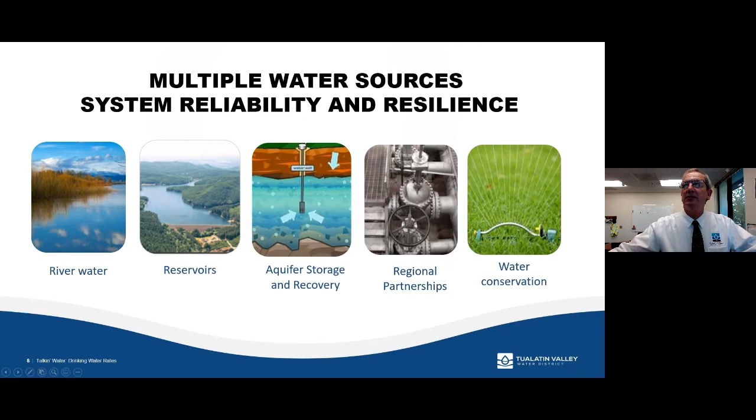So how is your money used when you pay your bills? What do we do with it? One of the things we are doing currently is the construction of the additional water supply. It is driving everything right now, and you'll see and hear more about that momentarily. But that's not the only thing. We have repairs and replacements of aging infrastructure in the system. This work has to be done in order to continue to have a reliable supply, so that's another thing we use the money for.

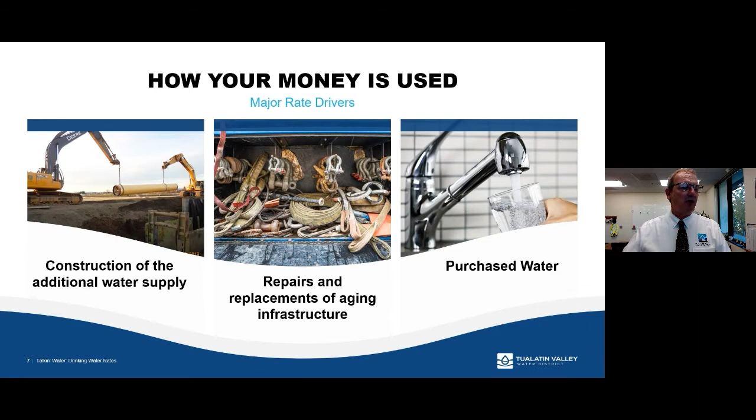And then lastly, purchasing water through the Joint Water Commission and the Portland Water Bureau is the other big area of spend and what we do with your money. But we take this all very seriously, and if you could go to the next slide, I'd like to explain a little bit about some of the challenges.

So we've taken actions to manage costs, working with the team here. I asked everybody on the team to look for how we could save money, where could we make cuts. We did reduce our personal services by about 2.8%. I like to point out that we are a lean organization, and we don't have a lot of extra staff capacity.

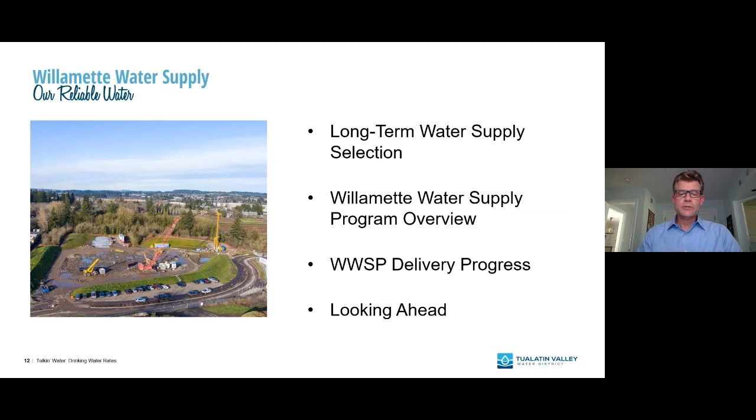I work for TVWD as the director of the Willamette Water Supply Program. I've got four parts to my presentation tonight. First, I want to talk a little bit about TVWD's history in terms of its evaluation and identification of long-term water supplies. Then I'll give you an overview of the Willamette Water Supply Program, tell you basically what it is. Then we'll talk about the WWSP delivery progress, what we've gotten accomplished since it started, and then looking ahead, what we plan to do for the next fiscal year and the years thereafter.

Regarding TVWD's long-term water supply selection, it actually begins back in the 1970s when TVWD acquired water rights to the Willamette River. Since doing that, TVWD periodically evaluated its water supply options, and that really picked up steam in the early 2000s.

TVWD commissioned a detailed study starting in 2011, so 10 years ago, that concluded in 2013, where the board selected the Willamette River after a multi-year technical study with public input. That study included the four options shown here on the right-hand side of this graphic.

Starting from the top and going clockwise, the first was groundwater wells to the north, developing a new supply there. Purchasing additional water going forward from the city of Portland to the east. Constructing the mid-Willamette River supply, or increasing storage at Hagg Lake and basically increasing the supply from the existing Joint Water Commission. Ultimately, through this study and with the public input, the district selected the mid-Willamette River supply.

For these notes captured here on the left, it was the lowest cost alternative, so it has less impact on rates. It provides excellent water quality as proven through almost 20 years of operational experience for the city of Wilsonville and also for the city of Sherwood that receive supplies from the Willamette River. It provides an ownership opportunity of the water supply for TVWD, which it currently does not enjoy with the city of Portland. It's a reliable supply, and of these options considered, it has fewer environmental impacts upon implementation. So the mid-Willamette supply, or the Willamette River supply, was selected as the long-term water supply source for TVWD.

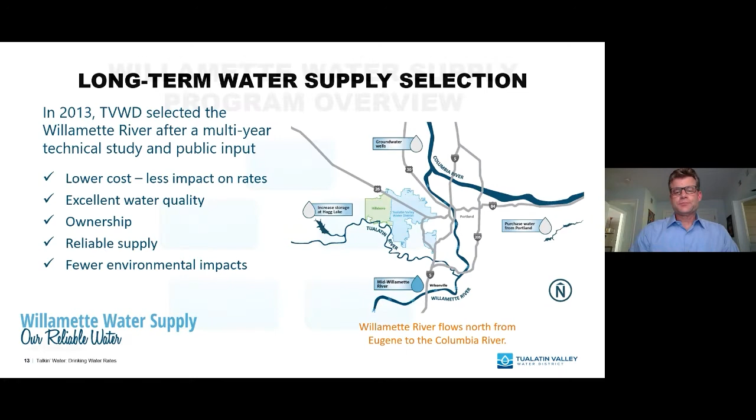So with that, we had to define the Willamette Water Supply Program, and these next slides provide an overview of what that program is. It starts with creation of our mission statement.

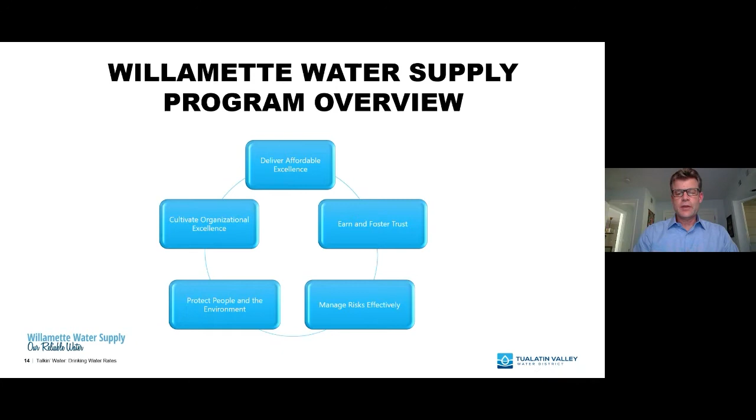The mission statement basically guides everything we do in the program. Let me read it out loud here for everyone: it is to provide a cost-effective, reliable, and resilient supply system by July 2026 that benefits current and future generations of the communities we serve and supports a vibrant local economy. That mission statement really guides everything we've done on the program and all of our planning. It has a target end date of July 2026, so all of our scheduling is to achieve that date successfully.

So that's the definition of the program. There's a new abbreviation here now, WWSS, the Willamette Water Supply System. So the program that I'm running is to create and build the system, the Willamette Water Supply System. Here's a really high-level overview of it.

It starts at the Willamette River with an existing intake located in Wilsonville that we are expanding and improving the seismic capacity of. We are also constructing a new state-of-the-art water treatment plant on the eastern side of the city of Sherwood. We'll be building more than 30 miles of large diameter water transmission main and water storage tanks up on Cooper Mountain. The graphic on the right here shows you, in very schematic form, what the whole Willamette Water Supply System looks like.

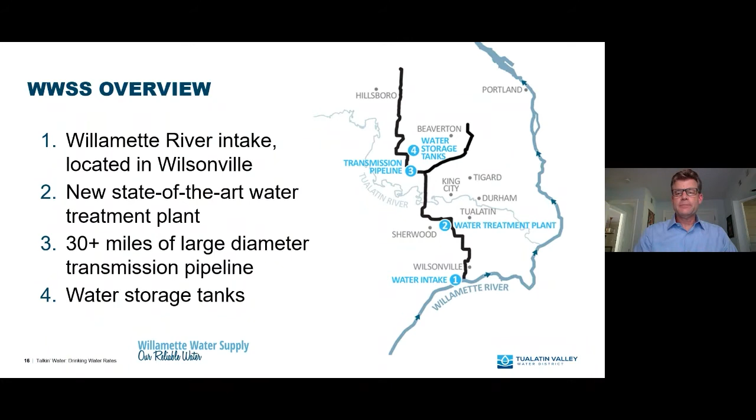These next few slides give you more of a visual image of what each of those elements look like. This is an aerial photo of the Willamette River Water Treatment Plant down in Wilsonville, on the bank of the Willamette River that you see in the background in this figure.

Go to the next slide, click one more time, and you'll see the flag there that captures where the raw water intake currently resides at the water treatment plant.

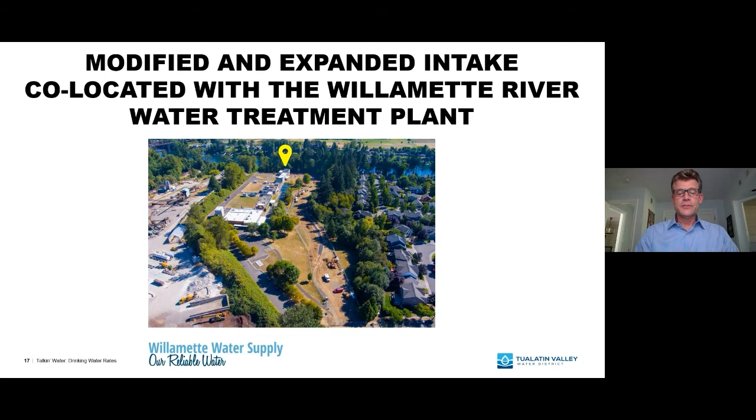The next slide shows an aerial overview of the Willamette River Water Treatment Plant, and right next to it is the treatment plant park, a really nice park there in Wilsonville. Go ahead and click one more time.

The dashed line highlights that square building on the bank, which is the raw water pump station. Below it, there's a pipe that extends through the bank out into the Willamette River, and then there's fish screens submerged in the river, which is where we draw our source.

Just to avoid any confusion, this aerial photo also captures above the water treatment plant what looks like a construction zone, but it's actually the operations area for Wilsonville Concrete Products right next to the water treatment plant.

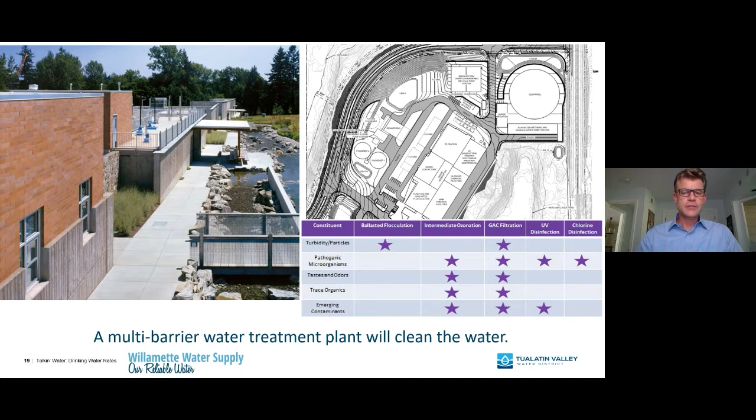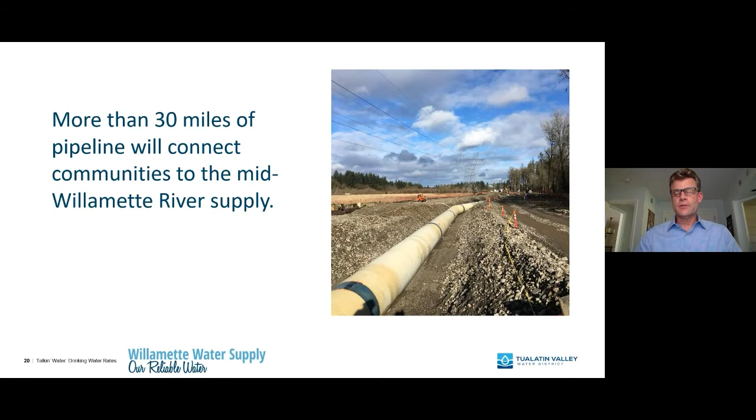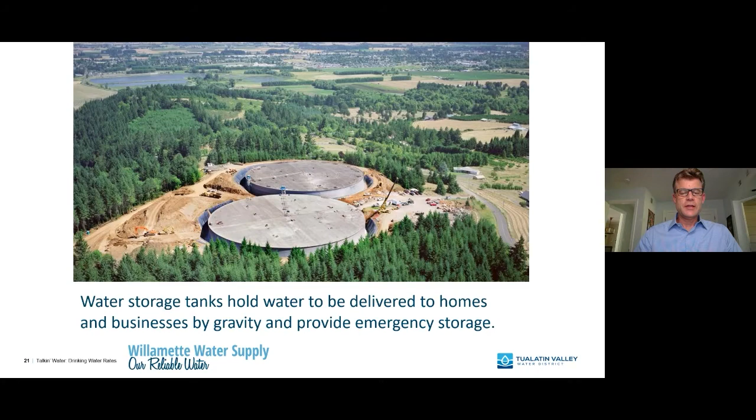So we've been in operation since 2015 as far as the Willamette Water Supply Program. That's when we first got started. So we've been operating the program for about 6 years. All told, we've incurred costs of about $300 million. And so a lot has been accomplished in this first 6 years of operations. These next slides show you what we've done, so it gives you a little bit of an idea of it.

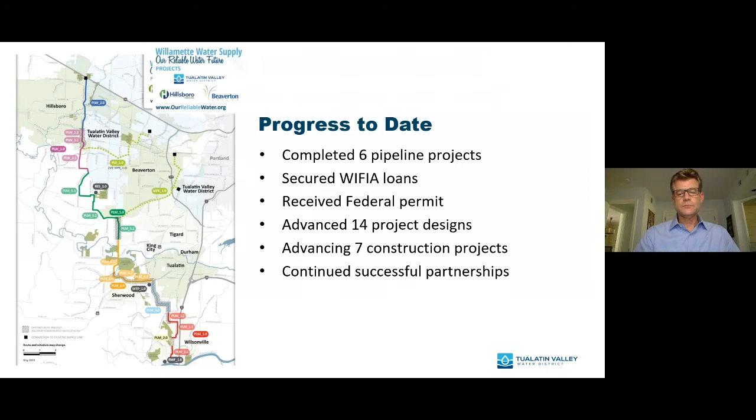What we found through our engineering analysis and technical studies is that in the event of a major seismic situation, such as the Cascadia Subduction Zone event, the bank of the Willamette River is likely to move towards the river, and that would take our raw water facility with it, rendering the water supply inoperable. And so we had to stabilize the bank of the Willamette River, given this is our single point of connection to the river.

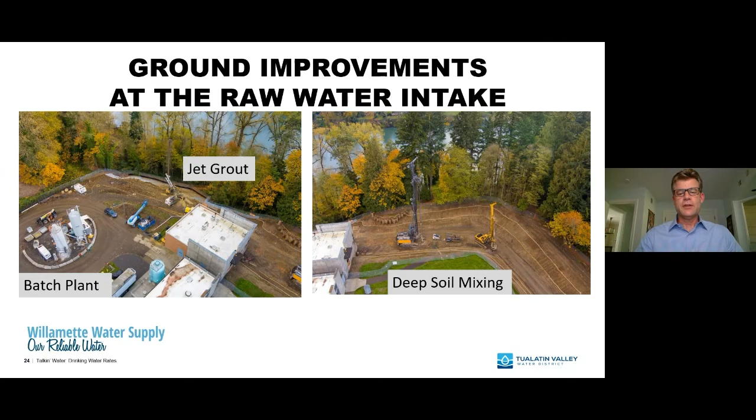So that's what we effected here, and this work is complete. That improvement is now done. We're now moving on to this facility in terms of seismic stability of the pump station itself, and that work is currently ongoing.

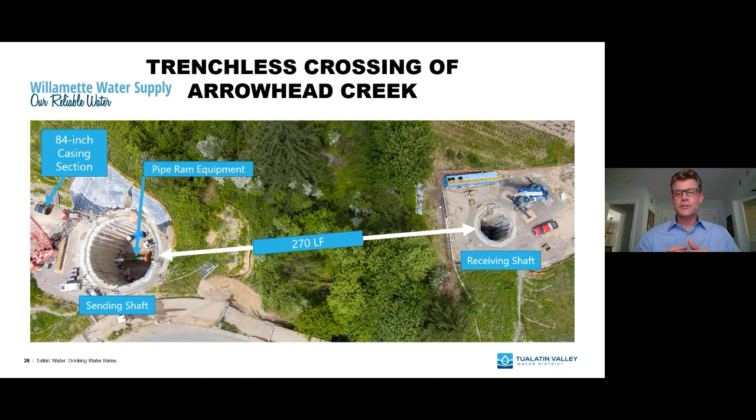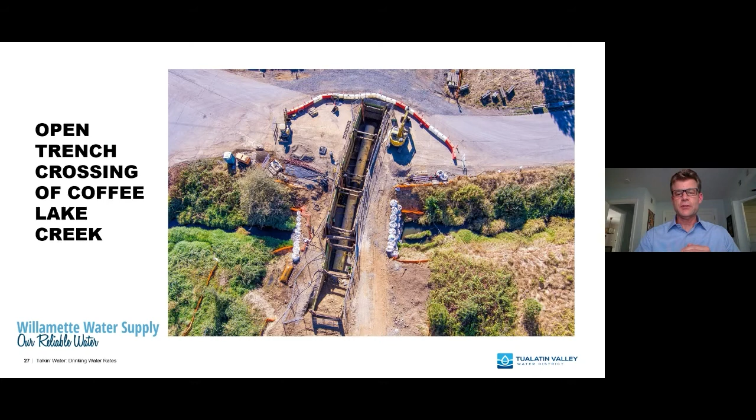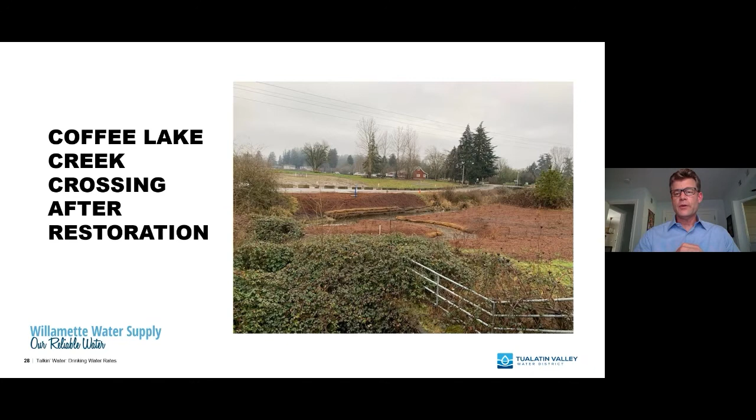But when we're done with all this work, this is what it looks like. So wherever we're doing this kind of work, we're always sure to restore the environment to at least as good as, if not better, the condition before we even got there. So it doesn't even look like we were ever there.

The work on Roy Rogers Road is done in partnership with Washington County. They were expanding Roy Rogers Road. We worked together with them to get our pipeline in at the same time they were expanding the road, to save costs and also to reduce impacts on the public.

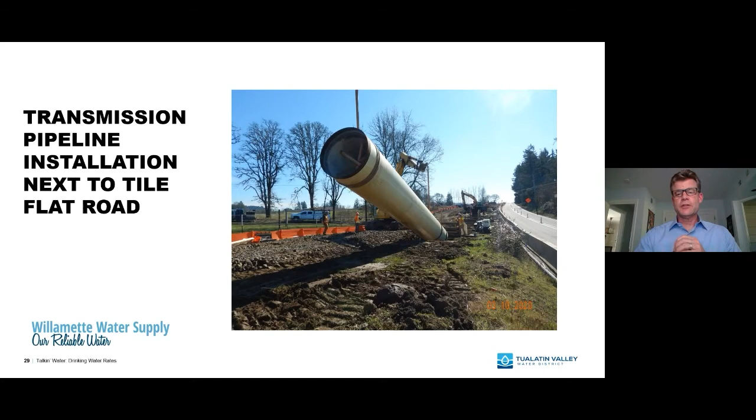Sometimes we work at night. This is a situation where we needed to cross 209th Avenue, near Farmington Road. It was the most efficient way for us to get across this road with the least impact on the public, doing the work at night and closing 209th Avenue for a brief period.

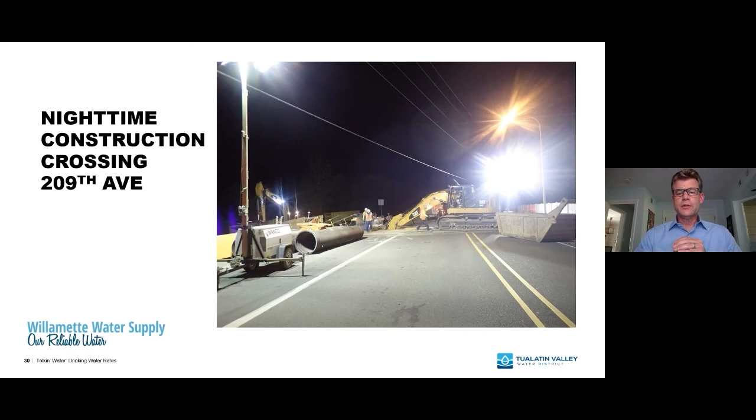We had approval from Washington County to close this crossing at 209th Avenue for the weekend. We started construction Friday night and finished Saturday night, so we were actually able to get out of there a day early. Safest way to do it, most economical way to do it, and again, least impact on the public.

That was a brief explanation of a lot of the work that's gone on over the last 6 years. One of the things we like to highlight is that a good portion of all the spend to date has remained what we call local, meaning within 50 miles of all the work we're doing. So when we look at the counties within 50 miles, 94% of the spend to date has gone to businesses in those locations.

Outside of that, we also track regional spend. Regional is anything outside that 50-mile area but within Oregon and Washington. Outside of that area is another 3%. It's really quite impressive that for the type of work and challenges we're facing, it's done not only with local contractors but local suppliers as well. Northwest Pipe in North Portland has supplied almost all of the pipe we've installed to date.

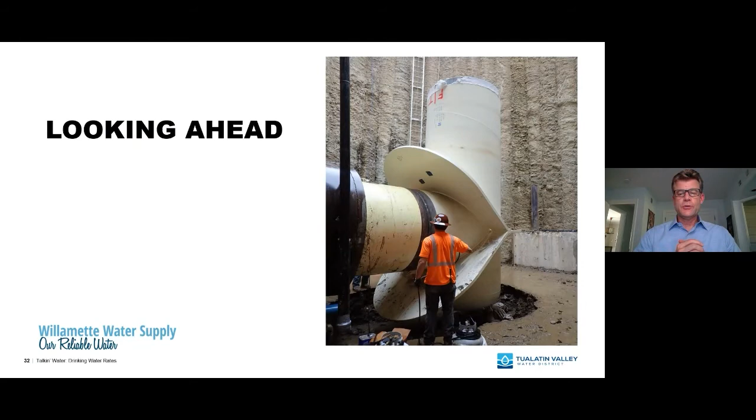Looking ahead, the next few slides capture what we're doing in the next fiscal year and the years ahead.

Other program management work includes WIFIA compliance and our loan programs, our safety program, communications and outreach program, and development of financial procedures. We'll continue acquisitions, wrapping up real estate acquisition efforts, permits and land use approvals, other procurement efforts, and continuing planning activities including water supply integration.

We're going to be bringing this new water supply into existing distribution systems. A lot of planning work is underway to make sure that's done appropriately, as well as commissioning and startup planning and other long-term operations planning.

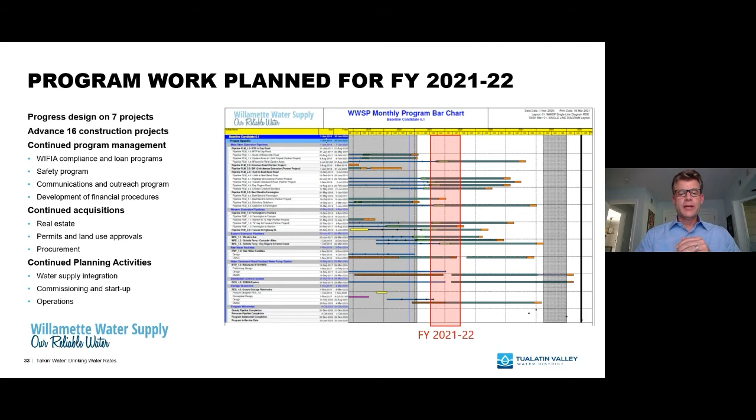It's critical that as we're doing all this work, we manage cost. There are 6 highlights about how we do that to the best extent possible. First is maximizing competition. From the very beginning of this program, at every step of the way, we've done our best to maximize competition on every element, whether a design element, a planning element, or a construction element, to make all our work as competitive as possible.

One of the first places we did that was with more than 30 miles of pipeline to construct. We made the decision not to do that as a single massive project, but rather break it into a series of smaller projects, sized appropriately so the largest capable local contractors had the bonding capacity to complete them, but also big enough that national contractors were interested in competing for the work. Through that, we were able to maximize competition and get the best prices possible.

After we select a contractor or designer, we negotiate the best price for quality services and goods to make sure, again, that we're getting the best price possible.

Along the way, whether it's in design or construction, we make cost-effective engineering decisions through constantly challenging ourselves through value engineering exercises. We're also proactively managing risks on every project, trying to identify risks we're currently addressing and risks that will come as projects progress, making sure we identify mitigation techniques and the responsible parties.

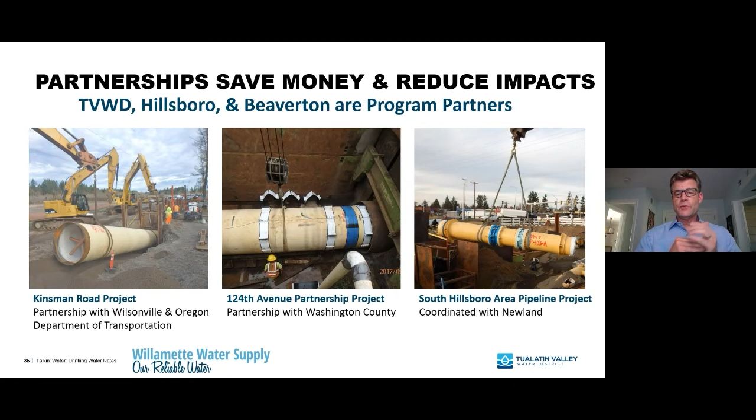Similarly with Washington County, they were building 124th Avenue and we knew we wanted our pipeline along that alignment, so we partnered with them. And in the South Hillsboro area, we partnered with a developer to make sure we got our infrastructure in before they built on top of us. Everywhere we can, we've partnered. It makes it a little bit harder, quite frankly, but in terms of cost savings and reducing public impacts, it's absolutely the right way to go.

Finally, I want to tell a story about this past year during COVID, as you heard about from Tom. Each year we go through an annual budget review on the program, presenting to leadership whether we're on track or if there are deviations and why. In December every year we prepare a draft budget for the next year and years through completion of the project, then present that to the committees and leadership, address comments, and get to an April board approval for the next fiscal year.

This year was more iterative because of COVID impacts and since costs had gone up a bit on the program. We needed to work hard to figure out how to get the cost down as much as possible to reduce the burden on the funding agencies—TVWD, Beaverton, and Hillsboro—to make it as manageable as possible. Factored into this is that within the next year all design will be done and everything will be in construction, so this year was our last opportunity to make significant changes and save cost. But substantial risk of escalation remains, which emphasizes the need to stay on track and keep on schedule.

So the rest of it, Paul, please. As I mentioned, the program includes 2 reservoirs on top of Cooper Mountain. We're only going to move forward with one of them. One of them will be adequate for the near term and for our initial operations, so we'll defer the second one for the future.

PLW2, as mentioned here, is our pipeline segment in Cornelius Pass Road from Francis up to Sunset Highway. We're going to be deferring most of that. It is an important part of the Willamette Water Supply system, but it's not necessary for initial operations. As demands increase and future build-out occurs, there will be a necessary element of the program to finish, but it will be done in the future.

And then there were some other minor deferrals or smaller cut deferrals, including a fiber optic system, some treatment plant components, and staff positions. All told, there's a $50 million cut in the program, which is going to help keep us on track and help address the financial realities due to COVID that everyone has experienced. That concludes my part of the presentation.

I'll pass it now to Paul Matthews. Paul?

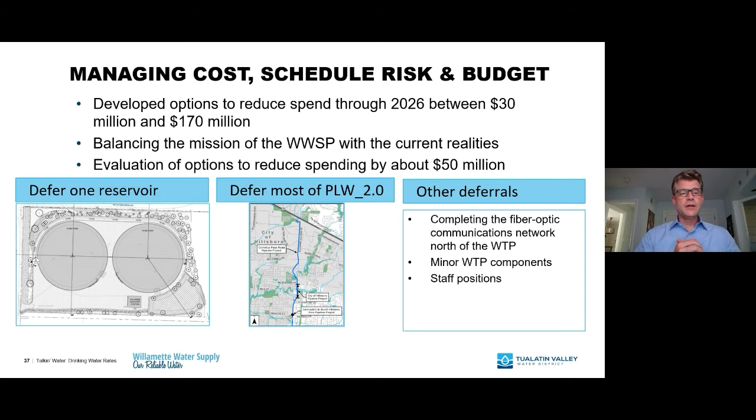Well, thank you, Dave. And I want to thank everybody who's taken time this evening to join us for open house. We understand that y'all have busy lives, and we're just thankful that you're able to join us and learn about these matters. It's greatly appreciated. As you've heard, I'm Paul Matthews, the Chief Financial Officer for the district, and it's my job, my responsibility, to match the financial capacity of the district to the needs that Dave and Tom have just described. So let me get into the details here as we go forward.

There we go. The district operates within what we describe as our financial management process. There are really 3 major phases to this. The first is the financial planning phase. With that, we develop financial strategies where we work closely with the board and the staff to develop approaches that will meet the district's long-term financial needs. The financial plan looks out 30 years, and it looks at future capital improvements, the effects of debt, and other matters to plan the district's financial future.

Once we have a financial plan approved, and we did that in May of this year, then we work towards the budget itself. We work with the budget committee, which includes our 5 members of the Board of Commission, as well as 5 citizen members of the budget committee, to get an adopted budget. We're on a biennial basis, which means our budget runs from July 1st of 2021 through June 30 of 2023. That budget is a 2-year spending plan that the district uses during that 2-year period, but again, it's consistent with the financial plan.